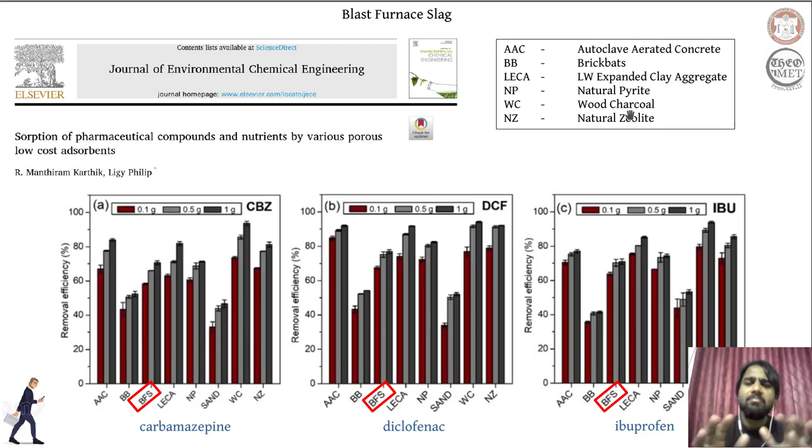Now, when blast furnace slag itself is able to manage several forms of waste that is anthropogenic in nature, why do we have to modify them? So essentially, we modify the blast furnace slag to improve the efficiency with which it is operating. Either we want to speed up the process at which the blast furnace slag is absorbing the waste material, or we want to use less amount of blast furnace slag to address increased contamination. This is one of the reasons why we modify the blast furnace slag.

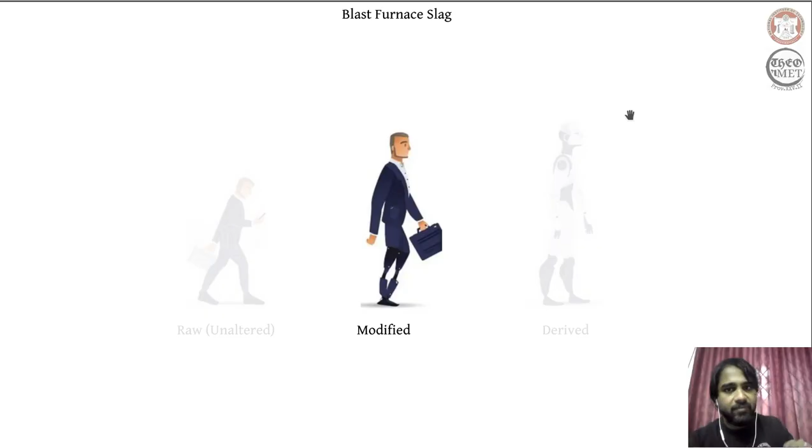The other reason is we have seen there are several forms of waste that blast furnace slag can manage, but there can be several different variants of a given waste. So we want to manage different variants of a given waste as well. So in order to do that, we modify the blast furnace slag. So two reasons: improve efficiency, and also increase the range of waste that blast furnace slag can manage.

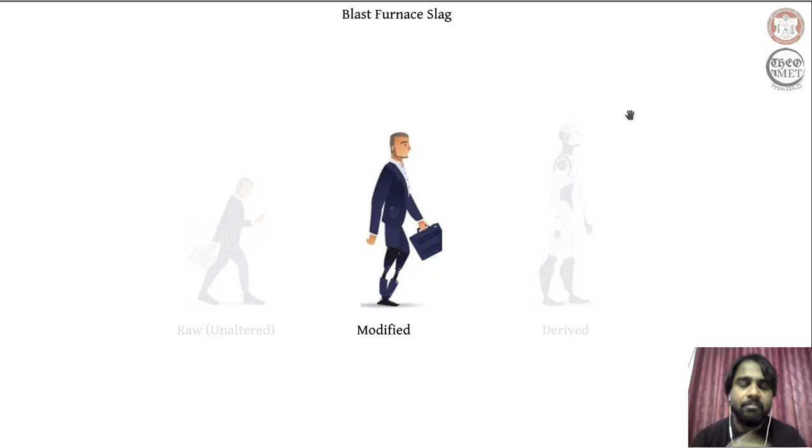Now, one modification that can be done to the blast furnace slag is to oxalate it. So what it essentially means is you are treating your blast furnace slag, which is crushed and dried, in oxalic acid. This forms a slurry. So once you have the slurry of oxalic acid and the blast furnace slag, you introduce sodium hydroxide, and the blast furnace slag, now potent with oxalic acid, begins to crystallize. And this crystallized blast furnace slag with oxalic acid is what we refer to as oxalated blast furnace slag, and it's referred to as slag ox, some cool name.

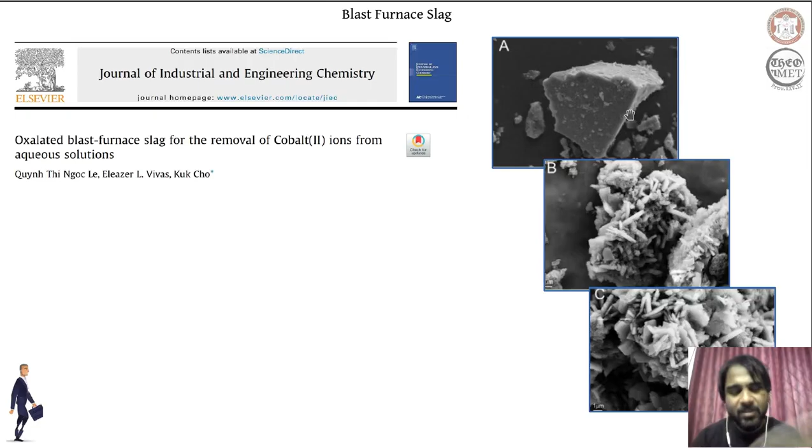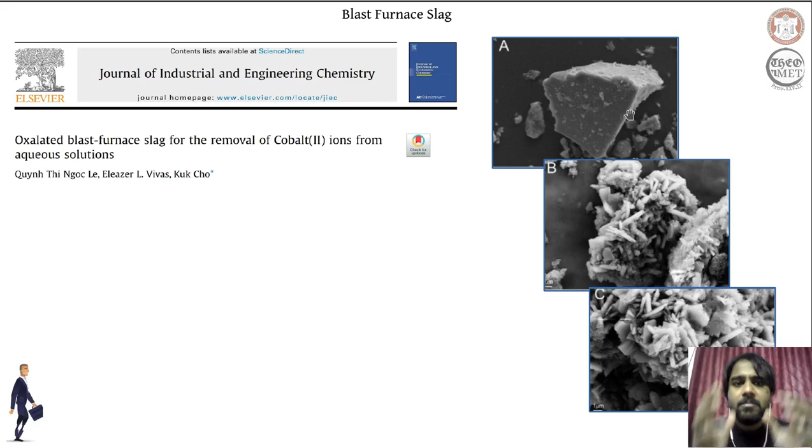Now this slag ox, or oxalated blast furnace slag, efficiently adsorbs cobalt ion. Cobalt is a heavy metal which damages our central nervous system and causes several types of impairment to humans. So this modified form of blast furnace slag, or slag ox, can efficiently trap this cobalt ion.

The source of cobalt ions can be several activities, including mining, but one source we have not considered in the case of raw blast furnace slag is nuclear waste. So when we use oxalated blast furnace slag to treat the cobalt ions generated from or present in nuclear waste, it is observed that this form of oxalated or modified blast furnace slag can efficiently trap those cobalt ions as well.

Here you can see a comparison made between a regular slag and an oxalated slag. If you are listening, there would possibly be an end semester question on this, so it could be a cool one. There is a comparison, and it is evident that the oxalated or modified blast furnace slag is more efficient in trapping cobalt when compared to raw blast furnace slag.

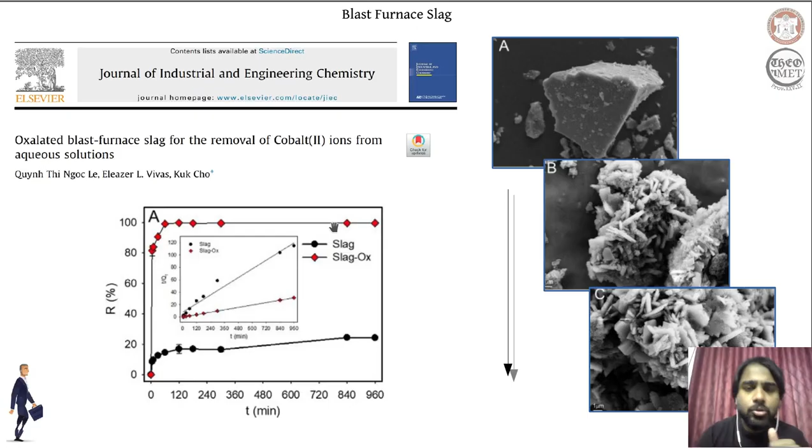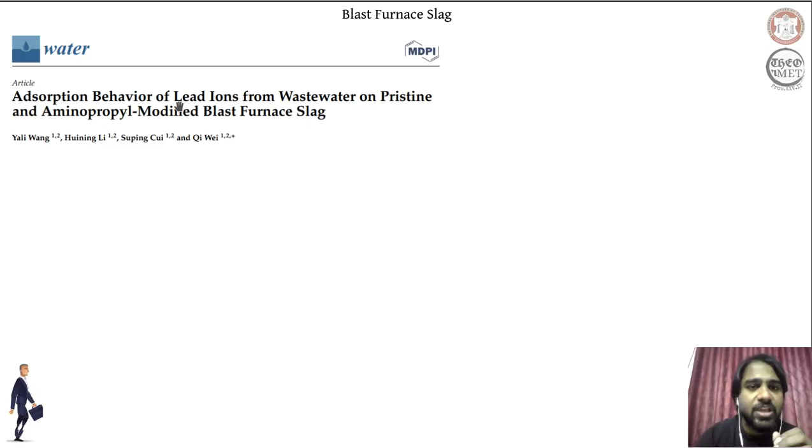In addition to oxalic acid, aminopropyl group can also be employed to modify blast furnace slag and increase its efficiency in trapping lead ion. Similar to cobalt ion, lead ion is also a heavy metal ion that causes severe damage to the human body and the environment that surrounds us. So in order to increase the efficiency with which the blast furnace slag traps this lead ion, we are modifying it now using aminopropyl group.

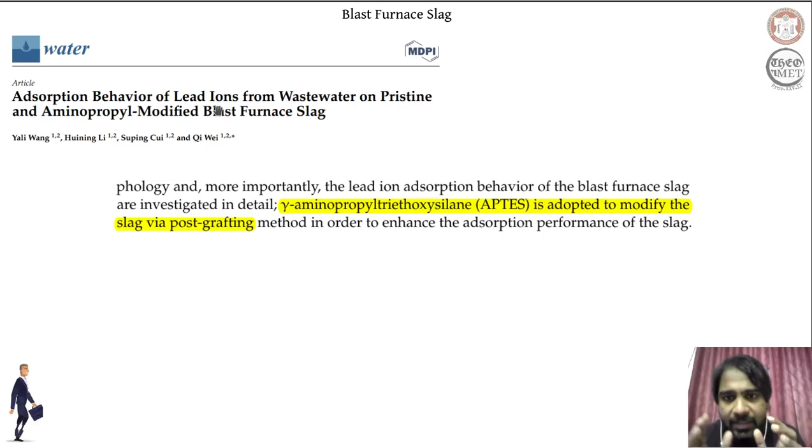One form of this group that we are going to adopt to modify the blast furnace slag is aminopropyl triethoxysilane. While this is used to modify the slag, in order to crystallize it we will be using ethanol. In the previous case of modifying it with oxalic acid, sodium hydroxide was used. In this case, ethanol is used to crystallize the modified blast furnace slag that is modified through the aminopropyl group.

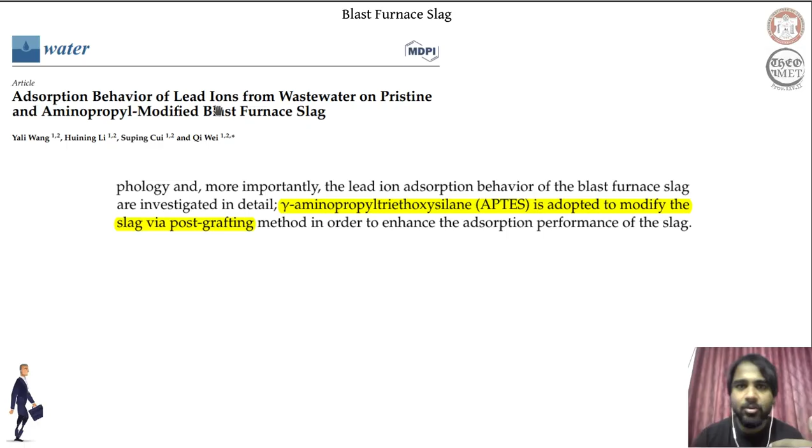The way or mechanism by which this modified blast furnace slag traps the lead ion is significantly different from that of the original blast furnace slag. That is primarily because there is a drastic change in the chemical composition of this slag.

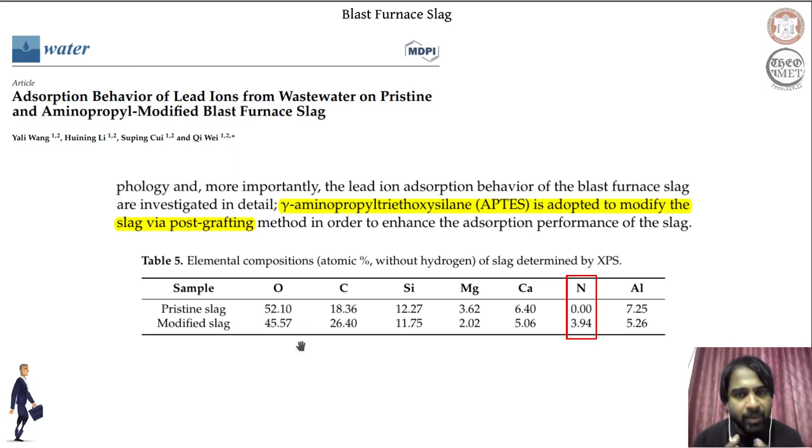As you can see, there are some visible increases in the composition of the modified blast furnace slag when compared to the raw one. So even though the components remain the same, there is an increase or decrease in the composition. However, there is one new component included in the modified blast furnace slag, that is nitrogen, which comes as part of the aminopropyl group. And this aminopropyl group is what is responsible for the enhanced trapping of the lead ion.

Originally, in the case of raw blast furnace slag, we relied primarily on hydroxyl groups to trap the lead ions. Now we have the aminopropyl group to trap the lead ions, and the bond that establishes between the aminopropyl group and the lead ions is significantly stronger, thereby increasing the efficiency with which the lead is trapped by the blast furnace slag.

One other waste that can be managed by employing blast furnace slag, which we considered in our previous session, is CO2. It was rather an indirect way we were able to reduce CO2 emission using blast furnace slag. In that case, we reduced the consumption of cement by replacing some of it with amorphous or glassy blast furnace slag. So indirectly, when we reduce the amount of cement being used, we reduce its production, thereby ultimately reducing the CO2 content.

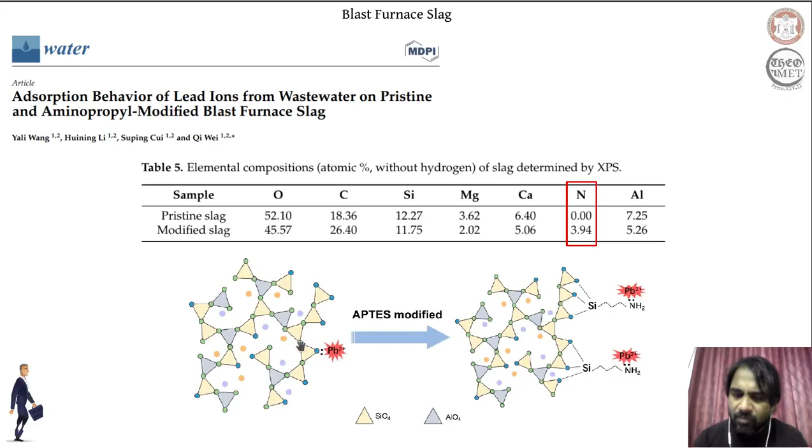However, cement is not the only source of CO2 emission. We also have the process of steelmaking and ironmaking that generates CO2. So the source of the blast furnace slag is also the source of the CO2 emission. Now what we are going to do is tackle that CO2 emission as well. The source of both these wastes is the same, and we are going to tackle one waste using the other, since both are generated by the same source.

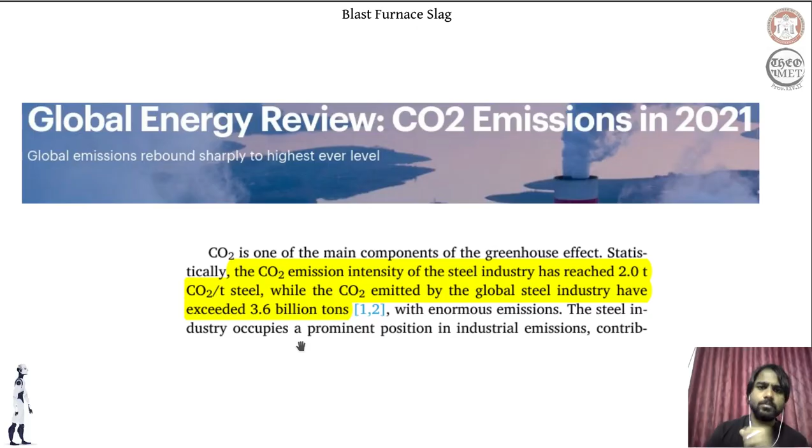In this case, even though the blast furnace slag is not essentially modified, the way it is deployed is significantly different. The mechanical properties or physical nature of the slag is modified in order to use it to trap CO2. The blast furnace slag remains the same, but now it is used in the form of a fluidized bed.

In this setup we have grounded blast furnace slag, and a setup that gives us fumes similar to those generated by any industry. This fume comprises CO2, nitrogen, and other gases. We are simulating something close to fumes generated in industries, and letting it pass through a filter that primarily comprises our blast furnace slag.

This filter comprises blast furnace slag particles which are floating under the velocity of fluid. Through these floating blast furnace slag particles, the smoke passes through, and the smoke will trap in the carbon dioxide content.

The reason it is able to do so is similar to how it traps heavy metal ions. There is an interaction between the composition of the blast furnace slag, and this interaction allows for the trapping of the carbon dioxide. This primarily stems from the structure of the blast furnace slag. The composition leads to a specific structure, and that structure is responsible for trapping in the carbon dioxide.

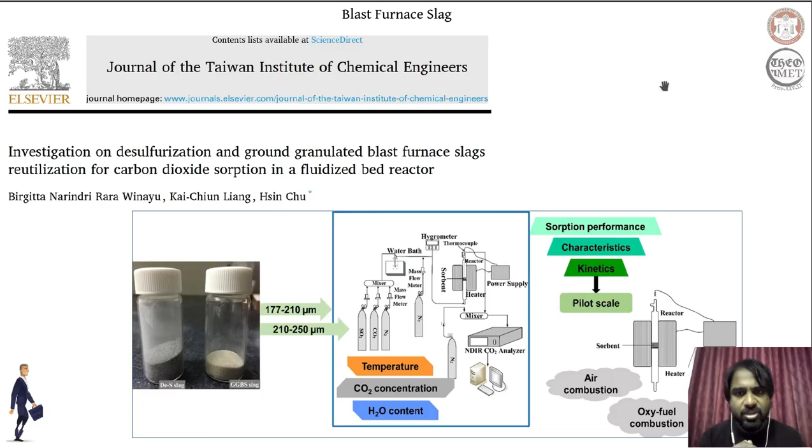So far we have seen the modified forms of blast furnace slag and the areas wherein it could be deployed. Modification can either be changing its chemical composition, adjusting its chemical content, or changing its physical features and deploying it in a specific way.

It is also possible for us to treat the blast furnace slag as a raw material and then generate or synthesize a new category of materials from it, ultimately deploying that new category of material into waste management.

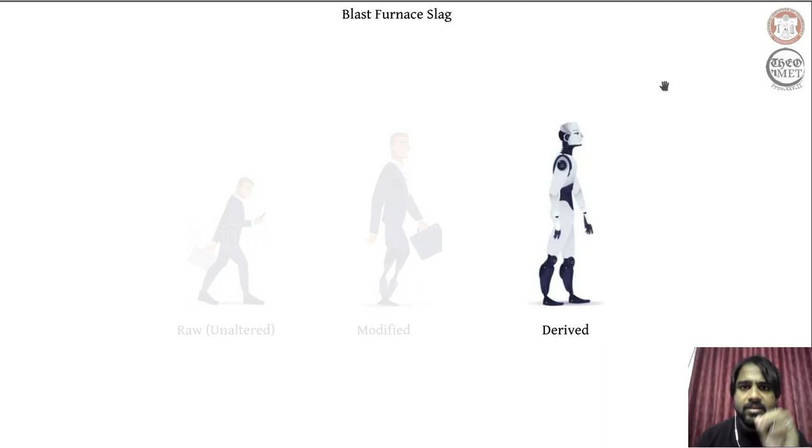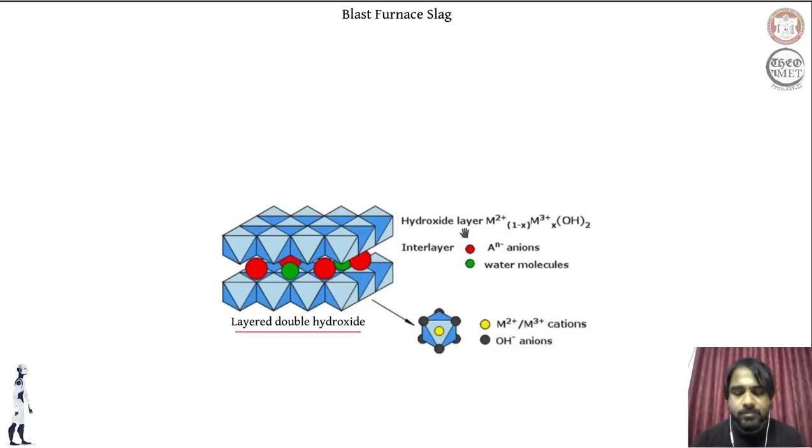The source for these metal ions that constitute the hydroxide layers can be different. When we use blast furnace slag, we are treating it as a source of three different metal ions, and correspondingly we were able to generate LDHs rich in calcium, magnesium and aluminium. So the source of this calcium, magnesium and aluminium is our blast furnace slag.

In order to synthesize such LDHs which comprise calcium, magnesium and aluminium, the process begins with the blast furnace slag being treated with hydrochloric acid. This hydrochloric acid leaches out the metal ions that constitute the LDH, dissolving them. This leached out solution, rich in calcium, magnesium and aluminium, is separated out, and what is left is rich in silica.

So you have your blast furnace slag treated with hydrochloric acid. The hydrochloric acid, when treated with a suitable parameter, leaches off the metal ions except for silicon. If you leave out silicon, all the other metal ions are trapped in this leachate, and this primarily includes calcium, magnesium and aluminium.

When this leachate is treated with sodium hydroxide, you will crystallize it. Under suitable conditions, you end up forming the LDHs with the metal ions from the blast furnace slag that have been leached out. When these metal ions are leached out, what we are left with is a silica rich gel, which can be used for other purposes as well.

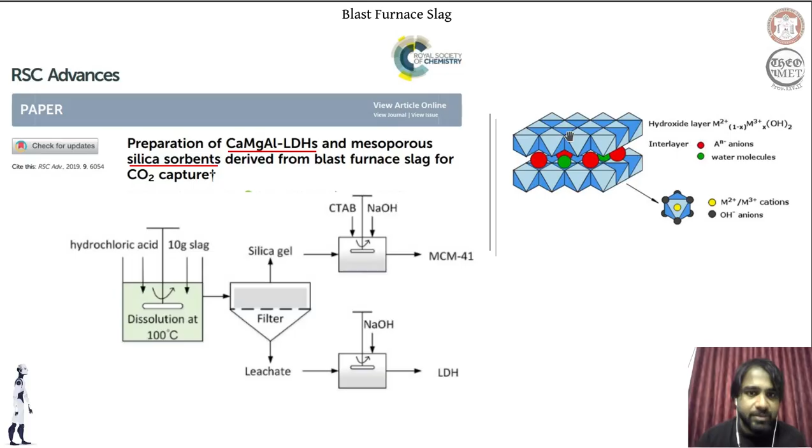So using blast furnace slag's chemical composition, we are able to build our layered double hydroxide, and this layered double hydroxide is employed to capture CO2. Generally it is the hydroxy group that allows for the capturing of CO2. We do the same, but in a different way we are deploying this particular group: we have a layered structure with enough space for the carbon dioxide to come and settle in.

Essentially the anion in this case is CO3 2-, and this CO3 2- gets replaced by carbon dioxide when this LDH is employed to filter out or capture CO2. So from blast furnace slag we are generating a new category of materials, and this LDH can be employed to trap the carbon dioxide content generated by any source.

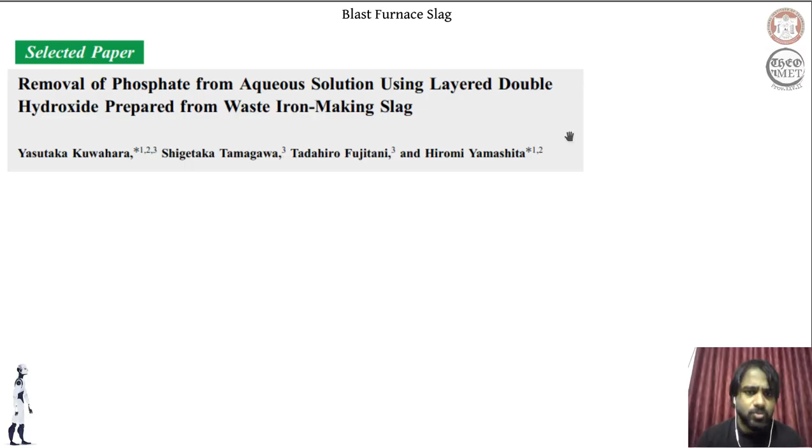Besides carbon dioxide, it is also possible to remove phosphate from a source using this LDH generated from blast furnace slag. The composition remains the same depending on the original composition of the slag, and the metal ions leached out vary, but when deployed for phosphate removal, it increases efficiency and performs well compared to raw blast furnace slag. Here you have the comparison between raw blast furnace slag, LDH generated from the slag, and pure LDH.

The key difference is that this LDH is produced from a pristine source, while this LDH is produced from blast furnace slag. As you can see, it performs better compared to raw blast furnace slag, but even though it's less effective, it's comparable to pristine LDH. So besides CO2, it is also possible for us to manage phosphate in solution.

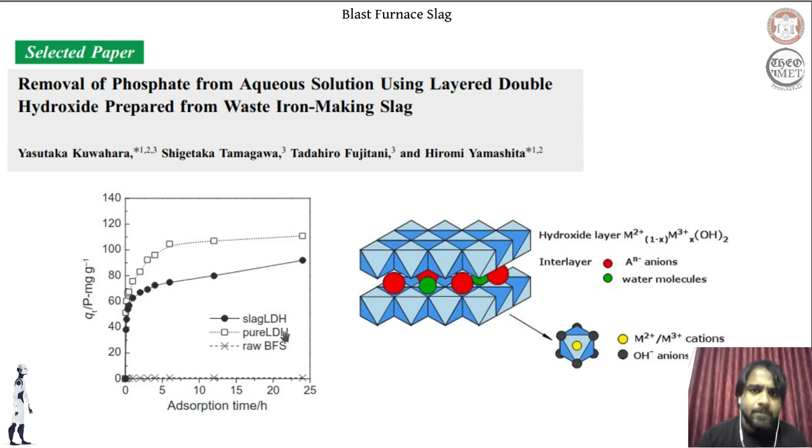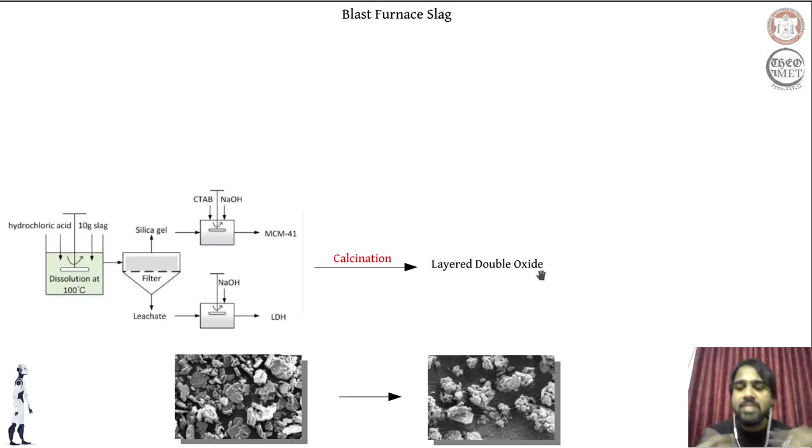Now consider the formation of this LDH and the technique employed. At the end of the day, when we have this LDH rich in metal ions, and we heat it under a suitable predetermined environment, it is possible to generate layered double oxide. So the composition of the layers now changes. The metal ions remain the same, but instead of hydroxide, these metal ions are now in the form of oxide. So we have changed LDH into LDO, layered double hydroxide into layered double oxide.

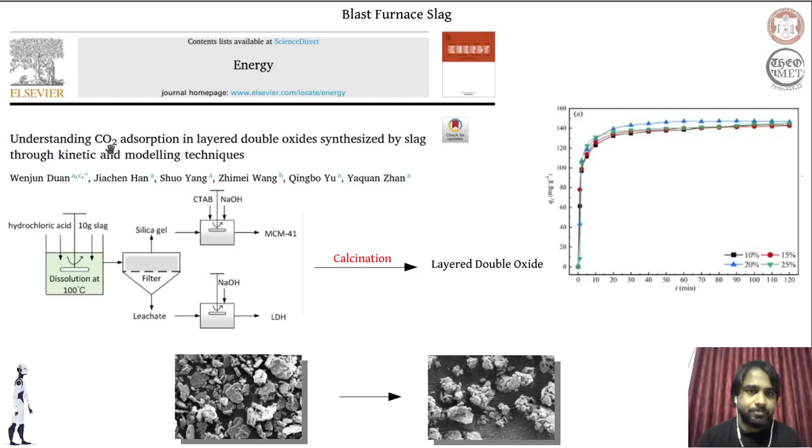This layered double oxide can also be employed to absorb CO2 emissions. Again, it is the change in chemical composition that makes carbon dioxide absorption by LDO significantly different from LDH. The process essentially remains the same; the only difference is we perform calcination after the LDH is produced. This calcination changes the chemical composition or configuration and ultimately leads to LDO, increasing carbon dioxide adsorption.

One advantage of layered double oxide over layered double hydroxide is that irrespective of the amount of LDO deployed for absorbing CO2, irrespective of how much we introduce into the filter, the efficiency more or less remains the same. Here, different percentages of LDO are deployed in the filters for carbon dioxide adsorption, and the performance more or less remains the same. So ultimately we achieve greater absorption with a lesser amount of material. When we change from LDH to LDO, the efficiency increases, which is why this additional step is taken.

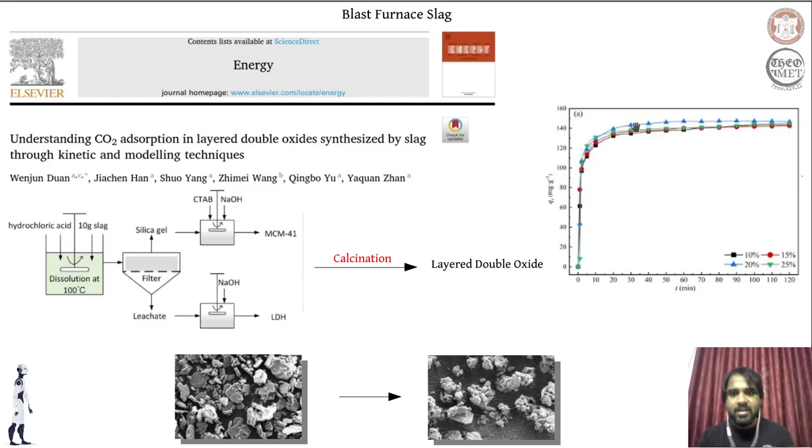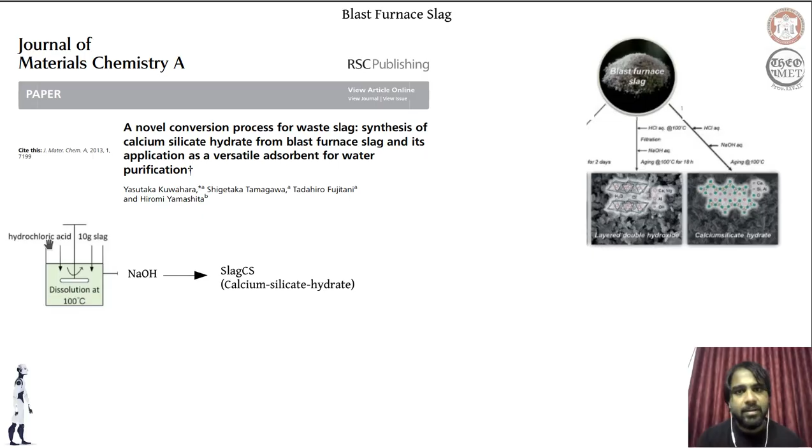One other material synthesized using blast furnace slag as raw material is calcium silicate hydrate. The approach starts with treating the blast furnace slag with hydrochloric acid. In previous cases, the experimental parameters were defined to allow leaching of metal ions. However, in this case, leaching is not done; instead, after treating the slag with hydrochloric acid, sodium hydroxide is introduced to crystallize it, ultimately giving calcium silicate hydrate form of the blast furnace slag, which can be used for trapping heavy metal ions.

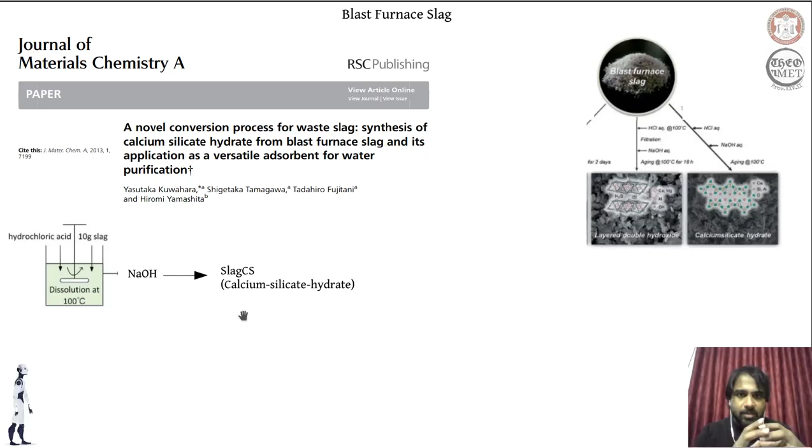Originally, heavy metal ions were trapped because of hydroxy groups or electrostatic interaction between the heavy metal ions and the blast furnace slag. Now we have a hydrated form of calcium and a hydrated form of silica. With the hydrated form of calcium, the bond established between the heavy metal ion and the calcium silicate hydrate is significantly stronger, thereby increasing the efficiency of the blast furnace slag in trapping heavy metal ions. Because we are changing the chemical composition, the efficiency with which heavy metal ions get trapped also increases.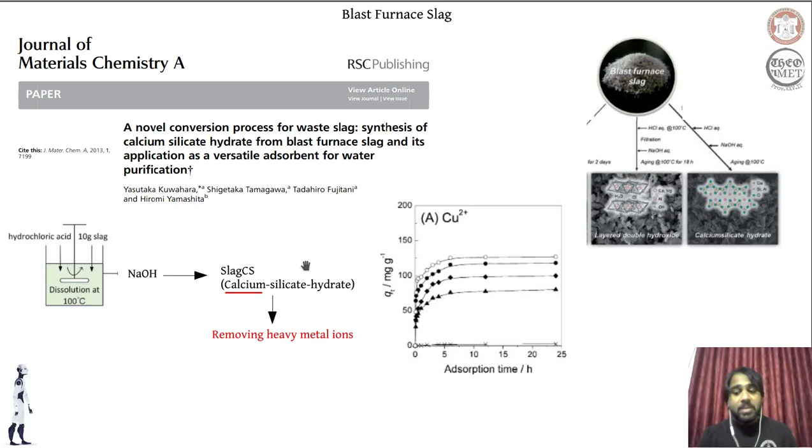The other form of material that can be generated using blast furnace slag as the source is silica nanomaterial. This can be traced back to the synthesis of LDH. If you recall, in the synthesis of LDH, we are separating a silica-rich gel from the leachate, which is rich in other metal ions. This silica-rich gel can be used to synthesize silica nanoparticles.

So the way we treat the silica-rich gel is such that, from the gel separated during formation of the LDH, we produce silica nanoparticles. The rest, instead of translating into an LDH, becomes desiliconized blast furnace slag. Both of these can now be used to manage dyes that get thrown away from textile industries.

If you recall, in the beginning of the session we talked about living opposite a textile industry, and the dyes getting thrown away from these textile industries. If you want to treat these dyes, we can use silica nanoparticles and desiliconized blast furnace slag, which are generated from blast furnace waste, in order to treat these dyes.

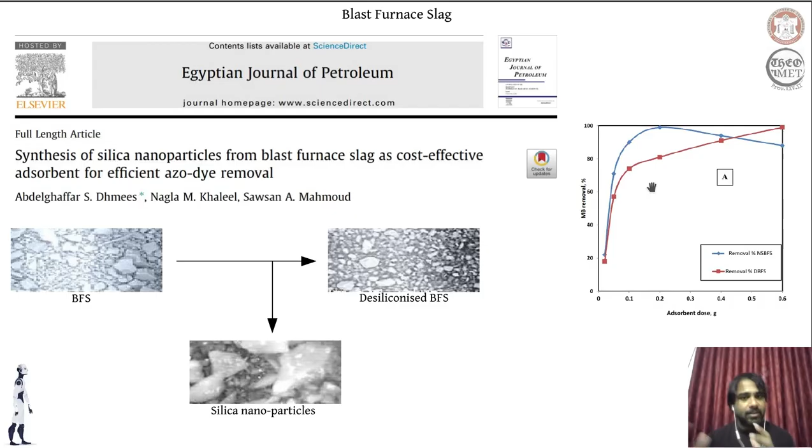Now we are using both components synthesized from the blast furnace slag: one is the silica-rich gel, transformed into silica nanoparticles, and the remnant silica-rich gel. Both are used to manage or trap the dye, and as you can see, both do an appreciable job in trapping and decontaminating the water from the dye.

Besides nanocrystalline nanoparticles of silica, it is also possible for us to use blast furnace slag to synthesize another category of material, activated alkali materials. These activated alkali materials are nothing but an alkali.

This essentially needs to be synthesized from an alkaline source and treated with high pH solution, thereby activating this alkaline material. So you have a high surface area, high porous source of alkaline material, and to that you introduce high pH solution. The combination of these gives you activated alkali material.

To generate these activated alkali materials, we are using blast furnace slag because of its chemical composition, which we have seen in the previous session. Because blast furnace slag is also an alkaline material, we use it as the source for generating or synthesizing this AAM.

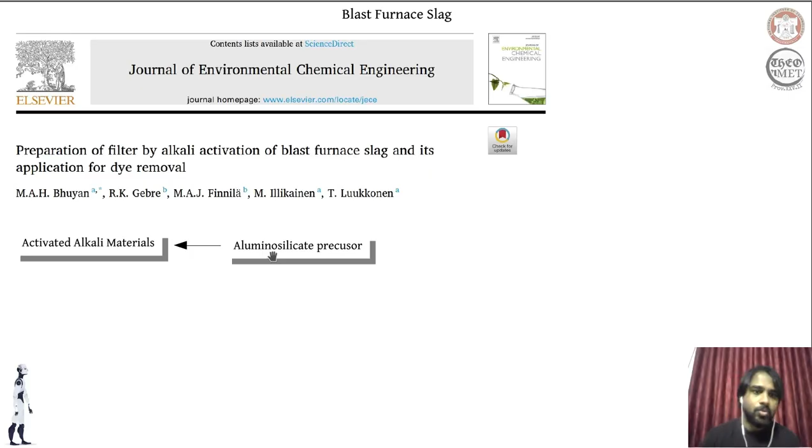Ultimately, the complex chemical nature of the dye and the chemical groups introduced by this treatment allow for cleansing the water contaminated with dye.

So we have seen that when blast furnace slag is modified, its efficiency increases, and different variants of waste it originally managed can now be managed. On the other hand, if we use blast furnace slag as a raw material, different classes of materials can be synthesized from it. One example is activated alkali materials.

The other is LDH, LDOs, and other forms such as nanoparticles of silica. So when we are able to synthesize such a wide range of materials, correspondingly the waste-managing ability of the blast furnace slag also increases.

We have seen it is possible for blast furnace slag, in different forms, to manage the dyes let out of textile industries. So besides the common example of construction, we have seen blast furnace slag used in managing a wide range of wastes. All these different discussions on how blast furnace slag can be managed are currently being looked into, meaning there is huge scope for potential research in each and every topic we have discussed so far.

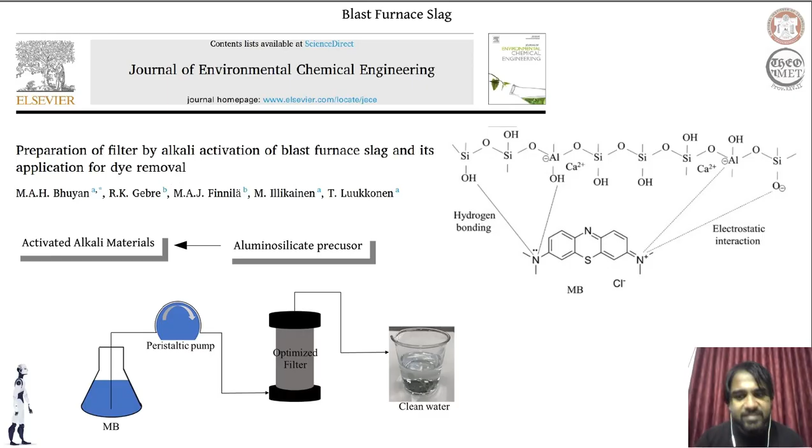I hope some advancement will be made in this area by one of you who are listening to it. Thank you.